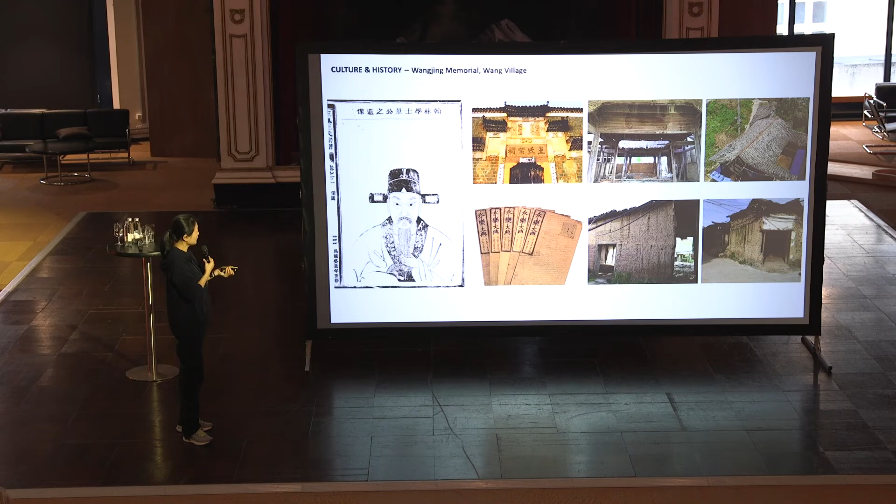So this brought up the idea of building a new memorial hall for ancestor Wang Jing at the center of Wang village, facing the original Wang family ancestors' hall. This building is meant to restore the pride and honor of Wang village for the community, for the villagers.

The building's exterior is rather humble, with traditional rammed earth, and you start to see the cement, actually the concrete structure system, extruding on the rooftop, but it's creating a dialogue with the neighboring buildings. The interior is articulated into a walkway to go through different stages of the ancestor's life story.

So every structural corner was converted into a memorial corner indicating life moments from his childhood within Wang village, and he became a scholar, an imperial scholar, and then eventually someone very famous and important.

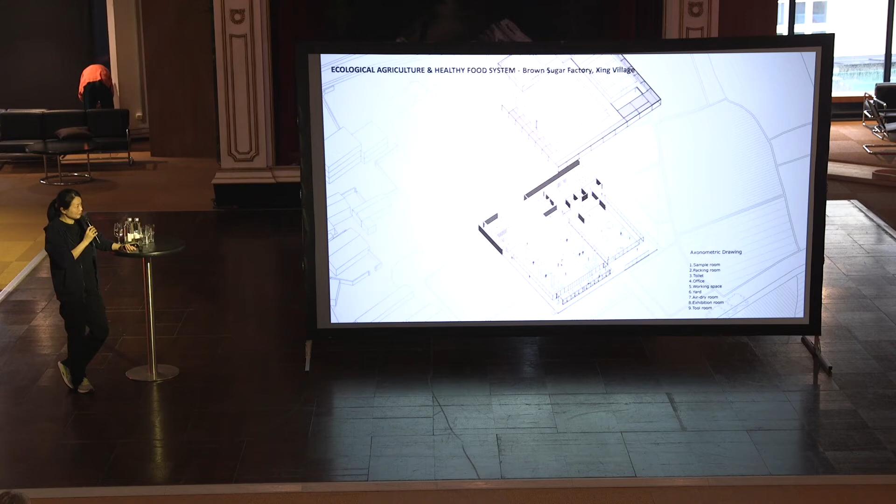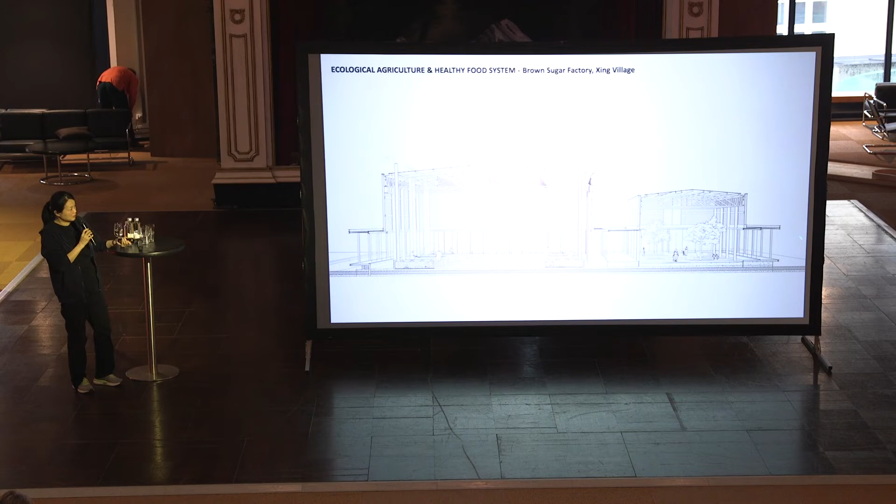This goes back to the first project, where we talked about the social structure and social system within China's rural village system. This is a collective space that upgrades production conditions and standards, with an enlarged space, a central production space, and also a space for community activities, leisure, and other events.

The brown sugar production from this village is known throughout the entire region, with a history going back hundreds of years. It has the best quality in the region, and the traditional way of making tofu and brown sugar is a striking performance. But there were many concerns with fire risks and hygiene issues.

If you walked into production made basically in the family kitchen, even though it tastes good, you'd have concerns about the product. So the whole idea of building a new factory was to upgrade the production quality standards, fit with food certificate standards, and improve production quality.

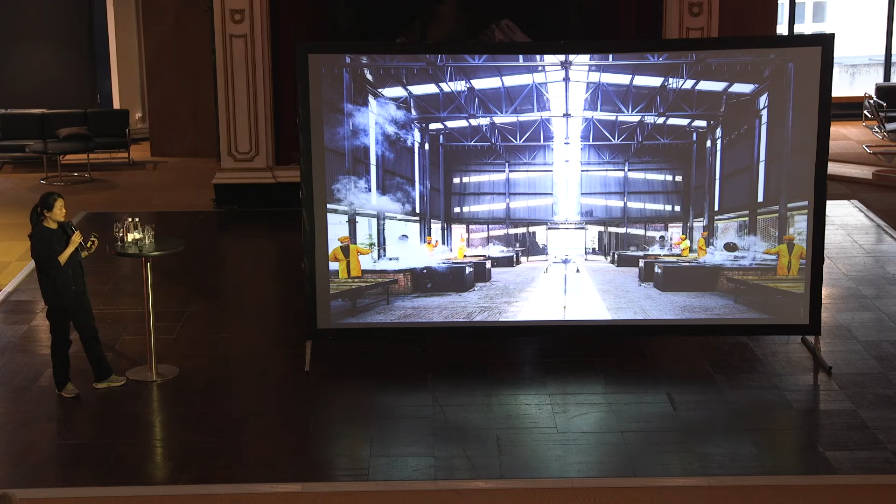At the same time, we wanted to introduce the making and cooking of brown sugar as the village's intangible cultural heritage. Production starts in November during the winter season before Chinese New Year, and it's very much a celebration in the village, where you can smell the sweetness of the cooking sugar. The cooking masters from the village, their movements and motions, make them the figures, the actors on stage.

The architectural idea for this factory is to take the cooking process as a performance, with the main production space as the central stage of the entire building, and other programs scattered around it. The rhythm of skylight, chimney, and working stations becomes the background to present the movement, the steam, and the heat, which is really a performance scene during production.

It runs 24 hours a day with three shifts, meaning every 8 hours there's a new shift. All these workstations are operated by different family workshops, integrated into a collective entity to operate the factory, and they are also the owners and shareholders of this new economic business entity.

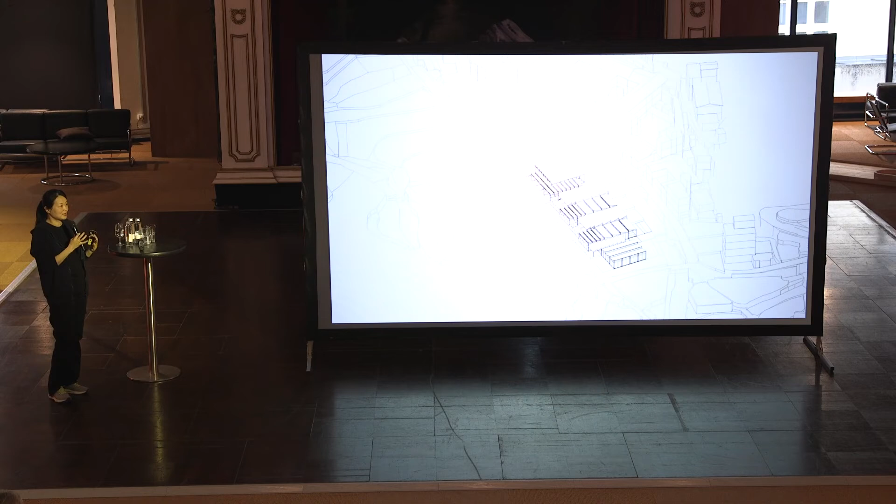Unlike the brown sugar production, which is one central stage with the main production space, the making of tofu is actually divided into different procedures, different chapters—that's the production scene.

The building actually follows this terraced topography, and it's also divided into 6 compartments based on the production procedure.

You enter from the storage, and then soaking and grinding, boiling, deep frying, and tasting.

So when you design a project like that, you really need to understand the very specific techniques of the different cooking production systems for each food.

But I think it was also a very fun, pleasant journey for me. It was really a learning process.

This is the grinding area. This tofu factory is also operated by family workshops as the shareholders—meaning they're the owners of this operation—and at the same time, the factory becomes a stage, or a series of stages, to introduce and showcase their traditional heritage and techniques.

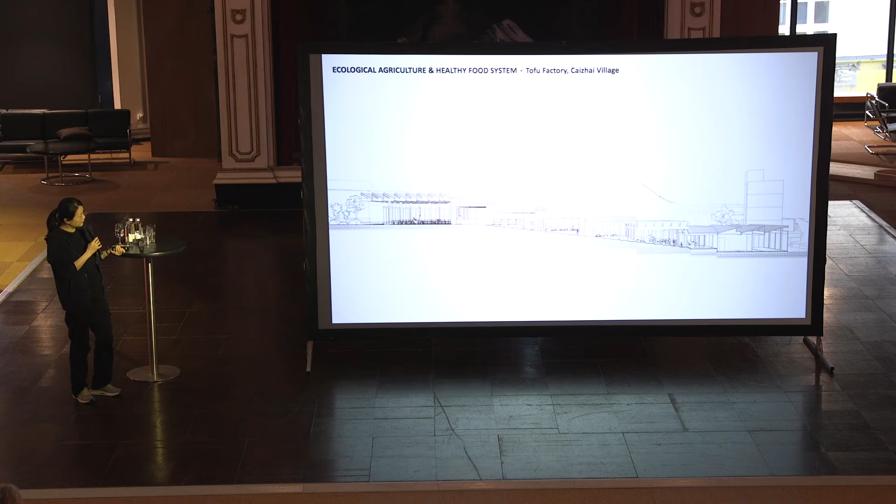The section shows how this building sits on the terraced topography at the entrance of the village, and is divided into different compartments based on the production procedure, with a parallel spatial sequence for production, visitors, and also villagers entering the village.

This is also a leisure, common space for the local community as well. And finally, you land at this tasting hall.

This is a multifunctional space for tasting for visitors, but it can also become a wedding hall for events, or a summer pavilion.

In a way, all these acupunctural spaces in projects in the rural villages always engage with multiple functions and minimal maintenance methods.

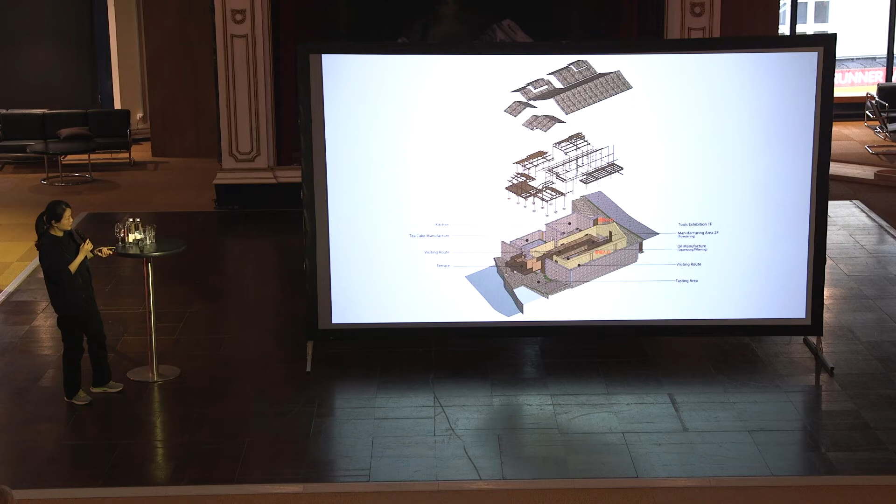Of course, it's a renovation, but also an addition to extend with other programs and spaces, including a leisure pavilion for villagers, and also to relocate the kitchen from the interior to a semi-outdoor space for safety reasons.

So that's the cluster of buildings looking from the exterior, and this is a pavilion next to the water, designed and built by local villagers, local skilled construction workers. And our addition is to introduce a new layer of extension spaces.

Actually the wall is concrete framing built with stone, pebbles collected from the water and cut in half, with this texture that really makes a contrast with the central rammed earth walls.

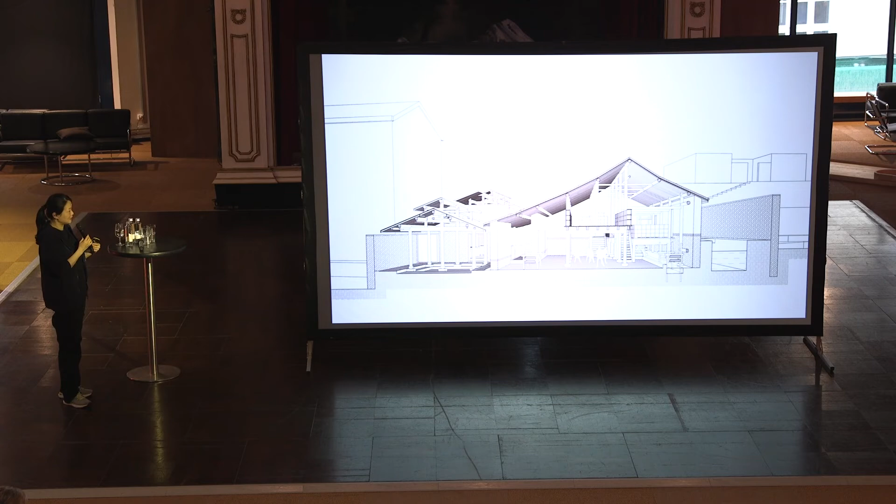And this is a kitchen removed away from the interior. So in general, it creates this maze labyrinth space around the historical workshop. And when you land at the center of the space within the original workshop, you can observe this production of camellia oil.

It's a milling system, and also the extraction process with this traditional wooden facilities and machineries.

The architectural intervention is rather to preserve most of the textures, and the new addition is to replace a portion of the roof tiles with local glass tiles, to bring in new, more natural lighting into the space, also to introduce this new layer of atmosphere of light.

And later on, we were also invited by Zimu Mountain Committee, which belongs to the neighboring county, and they wanted to work with a tea workshop for their tea production.

In general, all these food factories are providing local-made food with upgraded quality. The supply is within the region, within this county region, and it also becomes an educational circulation for the local area, to engage the local elementary and middle schools as their classrooms on site to understand their tradition and heritage.

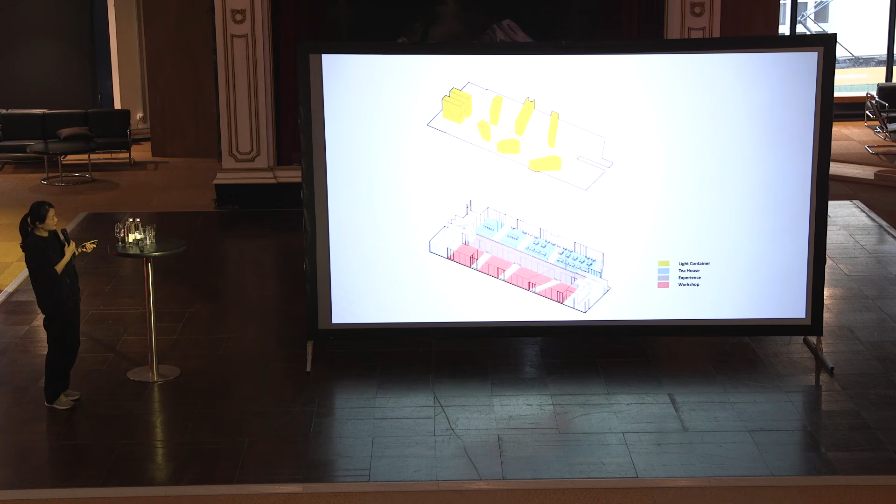This rectangular box is interjected with 8 light tunnels to bring in natural lighting to the central lounge. So that's how it's looking - a horizontal space with light tunnels extruding from its rooftop, sitting on top of this cliff.

And the production, of course, is done by the local skilled villagers with a traditional handmade tea making process. And if you look at the background wall, this is actually a cultural image.

It's a preparation for sun shading, but we also wanted to introduce this layer of pictograph of the She minority, since they don't have a written system - they have the spoken language, but not the written system. Instead, they have this pictograph. So we wanted to use all these pictograph images as symbols on the wall.

And on its elevation, it's starting from land, mud, and then going to sky, to the sun on top. So basically, it's reconfiguring an image of this mountain farming and hunting scenes of the She minority people.

And with this project, we wanted to try something further - how through architecture, through the space, we can translate the culture and tradition, the legacy and heritage.

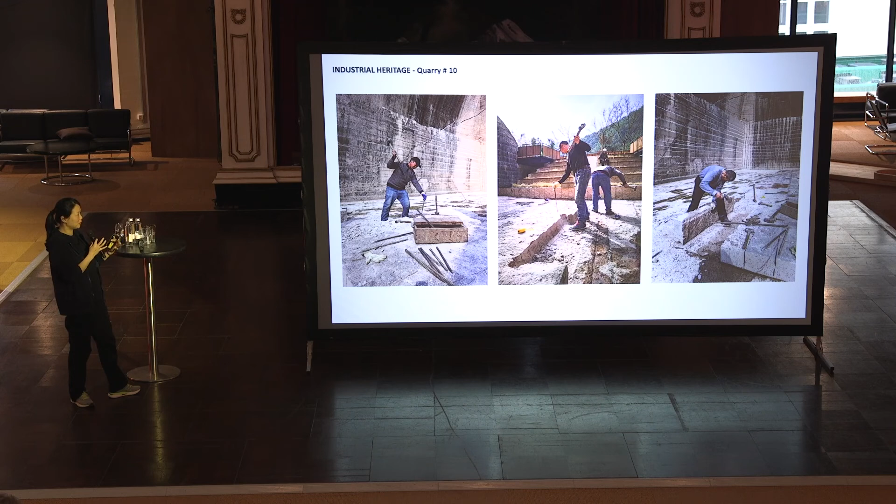The first quarry, as the first one of the cluster, is programmed as a live stage for the local quarry workers to demonstrate their quarrying technique.

The second one is converted into a performance space based on its acoustical quality in the quarry. Our intervention is rather with the ground surface, to create a different atmosphere, also a thin water canal when needed, but also to collect rainwater. It could also work as a stage, a sunken central stage for the young villagers in the village for their entertainment and performance, or for more traditional local opera performance.

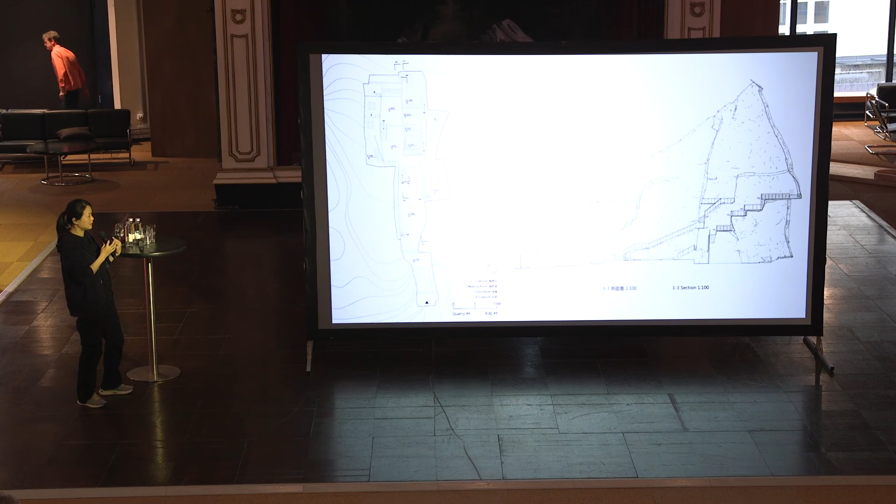And the last quarry next to, actually these three are not too far away, become a space that we wanted to also dedicate to the local cultural calligraphy heritage in the region.

So when you enter the quarry, you start to see this concrete reinforcement. It's designed by our geotechnical engineer, but it really resembles the quarry texture to form this gate.

And then if you enter the space, the inverse topography becomes a book mountain, with our design intervention introducing this new layer, almost a surface or a membrane, to indicate activities, a new program, public cultural activities into this quarry.

So walkways or terraces, and this book mountain is a Chinese cultural metaphor, we also call it a mountain of knowledge.

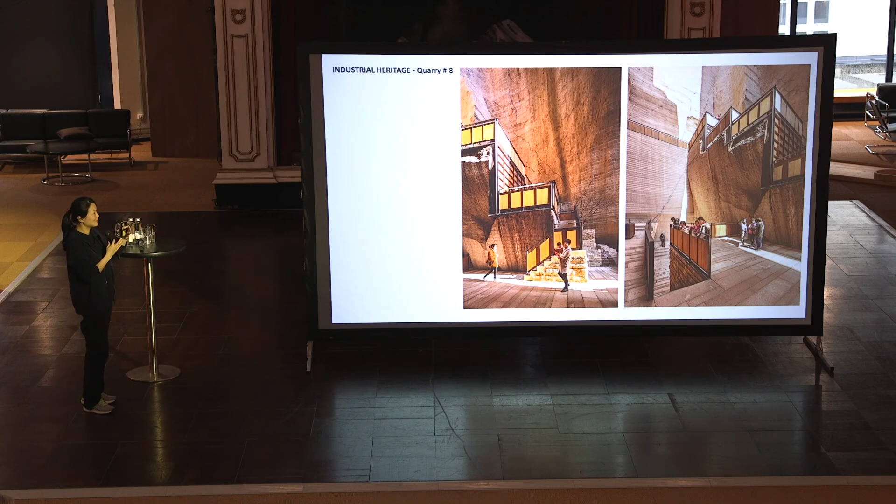So this is actually translated into the space only with this simplified structure and material, which is engineered bamboo panels that really wrap around the existing topography, existing terraces, and create new landing platforms, landing points for public activities.

And the whole design idea with this quarry project is not to present the architectural style, it's rather to bring out the attention toward the quarry spaces as spectacular architecture produced, actually done by hand, manually produced by the local quarry workers, as land art.

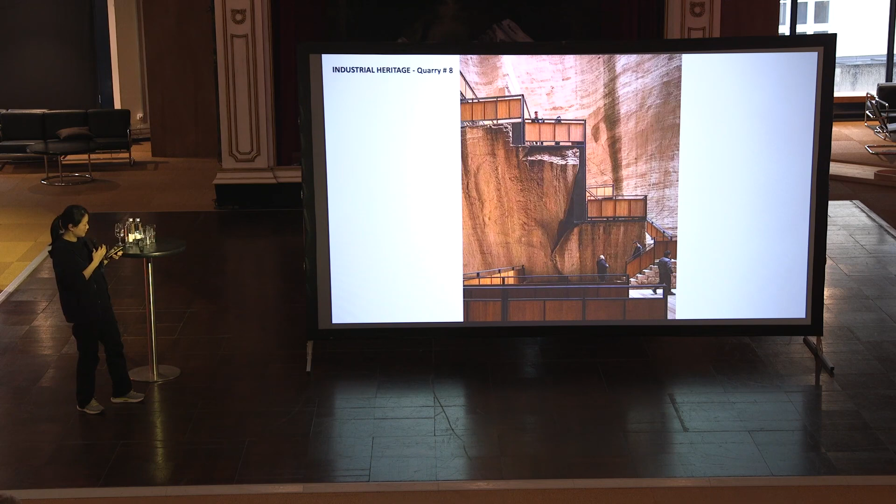And also the joint - we found that the joint in between these new additions, which are prefabricated in the factories, and this very organic form carved by the quarry workers, reveals a new kind of jointing or meeting layer.

And the spaces, of course, we see this as a monument to address the local quarry heritage and address the local quarry workers. And the last project is our current project.

I will go very quickly with this one. It's still under design, but I want to introduce and communicate with everybody how architects, or our work, is not only working with the given program, but we can really step out of our office and work in the field, communicate with the local communities, and also discover and explore local resources that can really become the inspiration for architectural design.

So this is also a small island in South China, and it's a home island of Mazu, the goddess of the sea. Macau, the name of Macau, comes from Mazu.

So with this island, we wanted to introduce architectural intervention, not only with this cultural custom belief, but rather with its ecosystem, with its very unusual living or life happening on the island compared to the continent.

So first of all, we work with this mangrove cultivation system, which is really an intelligent ecosystem to restore our coastal line with biodiversity.

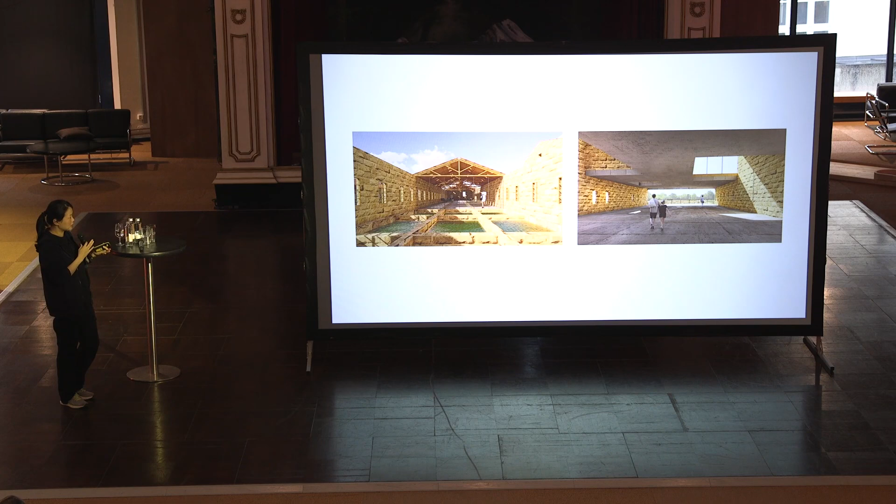Not only with the plantation, but we also worked with the existing abandoned structures for a new research facility for the scientists, for the researchers, also as an incubator for mangrove cultivation, reinventing the abandoned structure into a new cultural, educational, or research facility.

And on the island, if you look into the wastewater, actually it's the opposite of living on continent, where wastewater is the waste. But on the island, wastewater is still a valuable resource for fresh water.

So there's already a local indigenous tradition of having small circular ponds to store rainwater, with its natural filtration of this wastewater collected within the village, and to store it for different purposes, for irrigation of trees or vegetable farms.

So this brings inspiration for a new program of a water treatment plant, an infrastructure project to collect wastewater, to go through different terraces of lotus pond or water grass, a natural filtration system, and collect water in the center of this pond, but also become a community space and educational space.